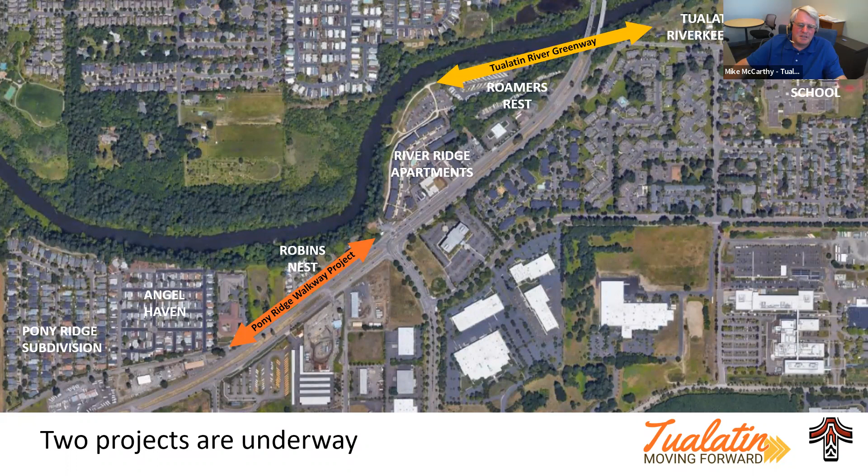The next slide shows a little more of the specifics. It'll start from right about where the bus stop is at the eastern end of Pacific Drive, where it meets Pacific Highway 99W, and run along that northwestern side in front of the Robin's Nest neighborhood and along some of those properties, up until it meets the existing sidewalk at the bus stop just west of 124th Avenue. So it shows about the general location.

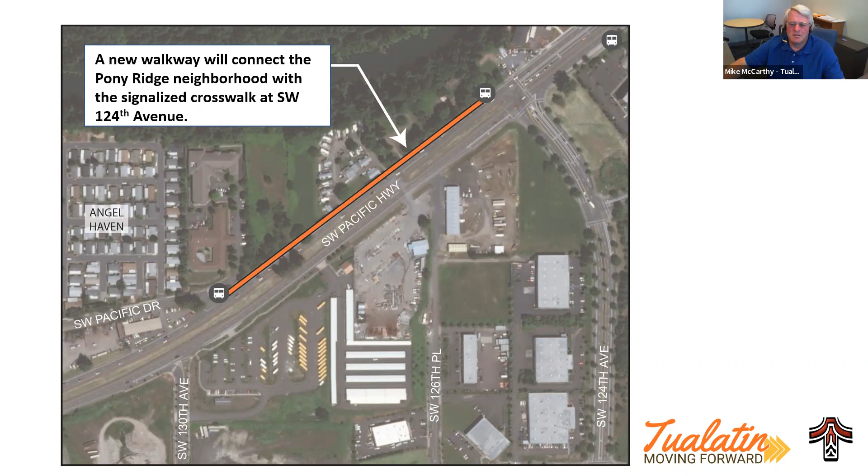Our plan is really just to build a basic walkway and keep disturbance as small as we can, and not make too many changes to the properties and anything else in the area. I think our next slide has a little more specifics about the project.

This kind of turns, so north is diagonally up and to the right on this aerial. It shows a few more of the specifics of where it would be. We're planning to build it within the existing highway right-of-way, but recognizing that it's a better walking experience the farther away we can get from Highway 99. The plan is to build the walkway along the far edge of the right-of-way away from the road, connecting again from Pacific Drive up to 124th Avenue.

You can see from the picture on the top left there, we'll have to work around some existing slopes, and we'll tend to be on the far side of the ditch. But between the back of the ditch and the fence is typically where it would end up being, where there are fences.

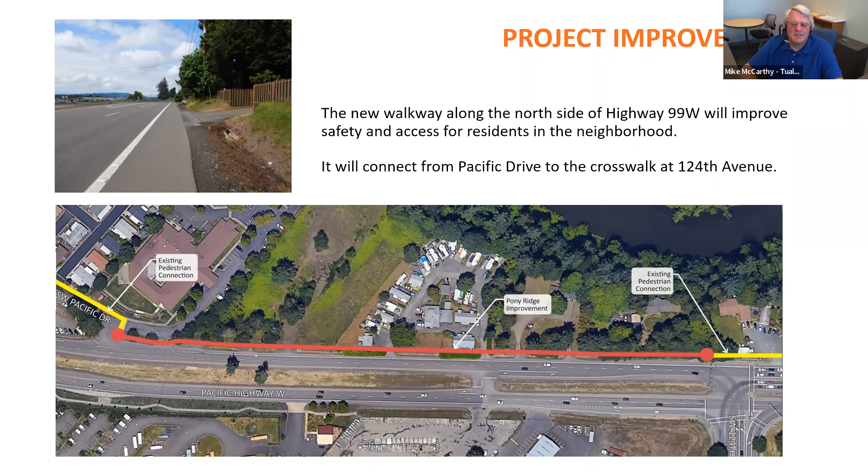And then the next slide starts showing some more of the specifics. And we're still fine-tuning the design right in this area.

I think you muted yourself, Jill. I'm sorry. Did we skip ahead? No, this is zooming in now, so we're good. Okay, feel free to chime in with anything else that I forget to mention.

This shows the western end of the project, or southwestern end. From the existing bus stop, unfortunately it looks like we will have to take out a couple trees right there, just because of where the path would need to go - it's hard to keep their root structures intact. We're hoping to work our way around the Riverwood Prestige Senior Living sign. It's possible that may need to move, but we're looking at trying to go on the road side of that. And then a couple of the light poles would also be getting relocated to serve the path a little better.

And then we're working along the back side of the ditch. There will be a little bit of extension of some of the culverts in there as we move towards the northeast, I think on the next slide here.

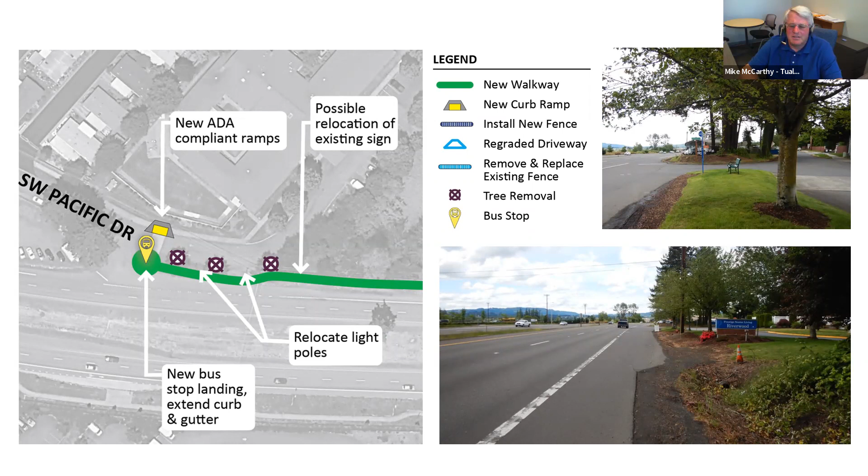Oh, and welcome, Lucy, and thank you for joining us.

This slide shows a little bit of how things would look differently after the project with the bus stop. We would be building a concrete pad there for people to wait on as they're waiting for the buses. And then the walkway would be going basically along the driveway to that Prestige Living facility up there, as it then progresses towards the northeast along Highway 99.

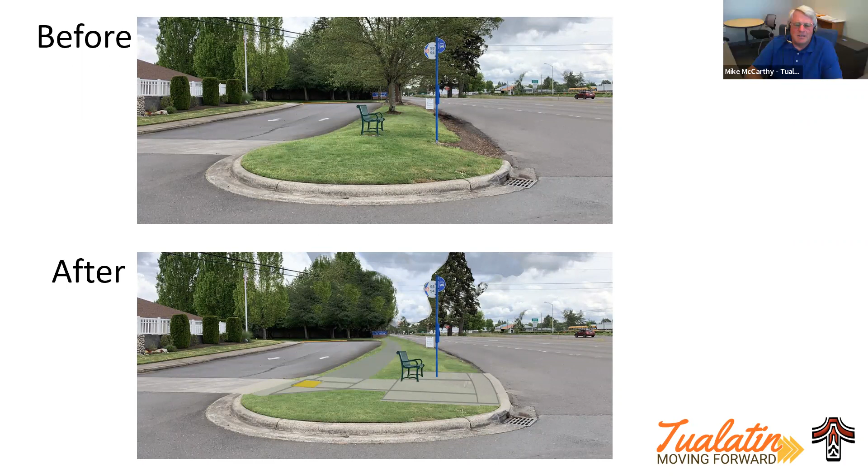And the next slide. This shows a little bit of how it would work around the Robin's Nest neighborhood. Is there anybody here from Robin's Nest? I guess it's hard to tell with people muted.

So our plan is to leave as much of the hedges in place as possible. That's a little different from what people may have seen earlier, where there was an earlier drawing shown that would take the hedges out. We heard from some folks that there's a lot of value to having that kind of screening from the highway.

So we'll basically be going between the back part of the hedge and the right-of-way line and trying to keep as much of the hedge in place as we can.

And then where it crosses the driveways, we'll have to do a little bit of regrading. There are some federal requirements for the Americans with Disabilities Act that mean we have to make the cross slope of the pathway fairly flat, which will mean a little bit of adjustment on some of the driveways.

And we are or will be in touch with some of the folks here that have the houses right next to where the path will be going, with some modifications there. We are planning to construct a new fence along the Robin's Nest property to help establish or replace some of the shielding that would have to get removed for the pathway to go through.

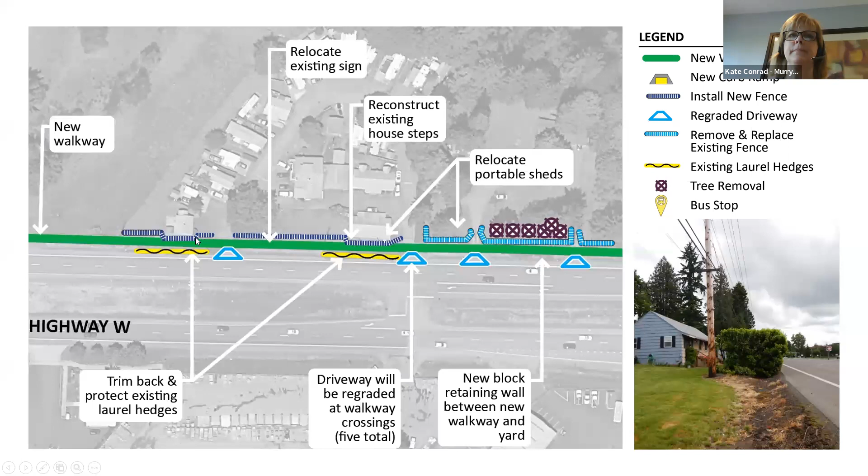And then as we get towards the east, we'll end up having to rebuild a bit of that existing fence on the property to the northeast of the Robin's Nest neighborhood. Unfortunately, there's a few trees right there that we didn't see a way we could get the pathway in while keeping in place, particularly the way some of the roots are extending out - we don't want to leave a hazard tree. So we ended up needing to remove some of those, and we'll be working with the property owner on that.

And then in some places we'll have to build a small new retaining wall, usually to cover the difference, maybe a couple feet or so of elevation between the top of the walkway and the existing yard.

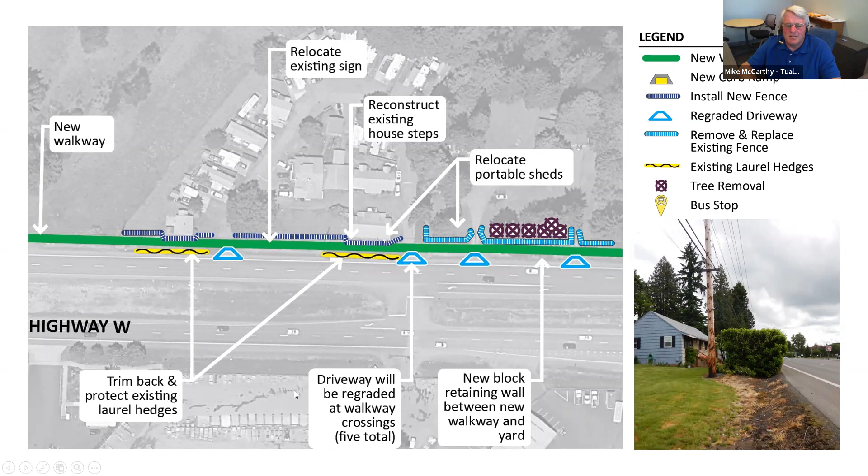And basically we'll do our best to make it a decent facility to walk on while keeping some of that same screening between the road and the neighborhood.

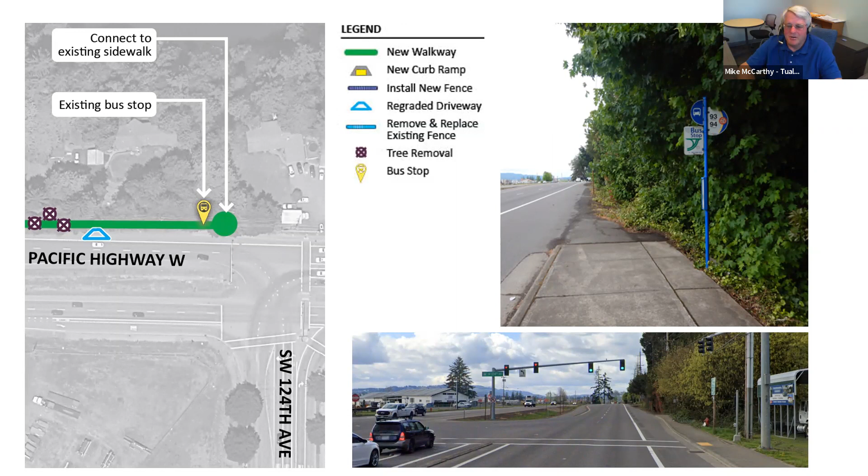Well, thank you, Doug, for joining us.

Here's another rendering showing how the pathway will look. We'll basically just have to cut back some of the vegetation, only what we really need to. Then there'll be a little bit of separation between the walkway and the roadway pavement.

We're getting towards the later stages of design, working out some of the real specifics of how it comes together. We've had to do a lot of coordination with the state to get their permission and approval to build this along Highway 99W, and there are some state requirements that have driven aspects of the design.

We're planning to build in the spring and summer of next year, so we'll be going out to bid more in the winter, then spring and summer construction.

We'll be working with the contractor, requiring them to do what they can to minimize their impact on properties and keep driveways open. I think they'll be able to keep the driveways open except when they're working in the immediate driveway area. So there may be some day-long closures of particular driveways as they're repaving parts of the pathway.

We will actually have a bid alternate for the pathway to be either asphalt or concrete, depending on what the contractor believes they can construct most efficiently, and what they believe will save the taxpayers the most dollars in getting this done. So that's the basic schedule.

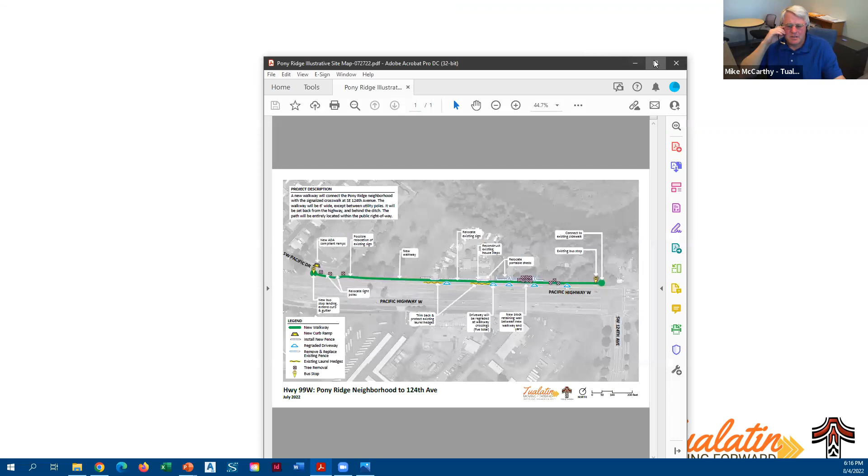I have a couple questions. How wide is the path? The path is generally 6 feet wide. There'll be some places, such as when we're going around existing utility poles, where the path will have to narrow to 5 feet for just a very short distance.

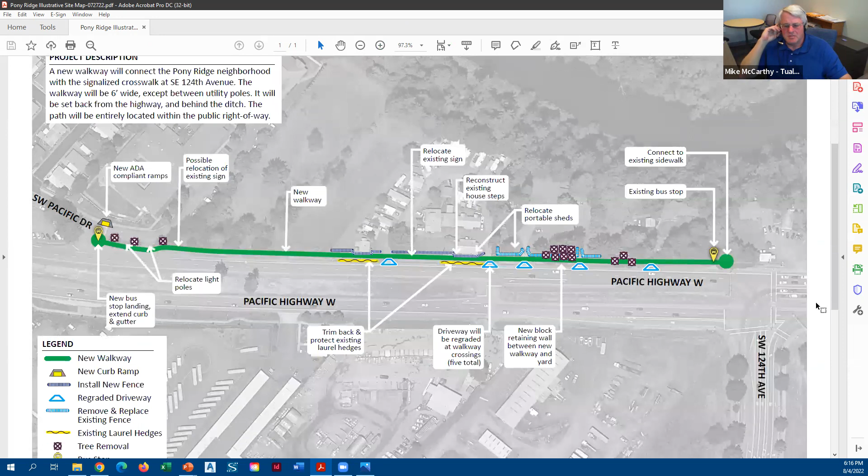The plan is to leave the existing utility poles where they are, because as you may notice, there's a lot of wires up there and some high voltage power that make it especially difficult to move.

What kind of fence are you building, and how high is it? Kate, do you have the specifics on that? I think we've discussed that the standard fence is 6 feet high and it's a wood fence. If we're replacing a fence, we want to replace it to its existing configuration. In the Robin's Nest case, we are proposing a 6 foot high wood fence.

Yeah, it is due to privacy and the close proximity between the public and private. Right.

And also, by building the path behind the hedges, you are creating a planted strip or landscaping strip for the roadway. So would it become the city's job to maintain the hedges?

No, it's actually a citywide code that anything in the right of way, like landscaping outside the road, is maintained by the abutting property owner. So it would remain Robin's Nest's responsibility to maintain the hedges.

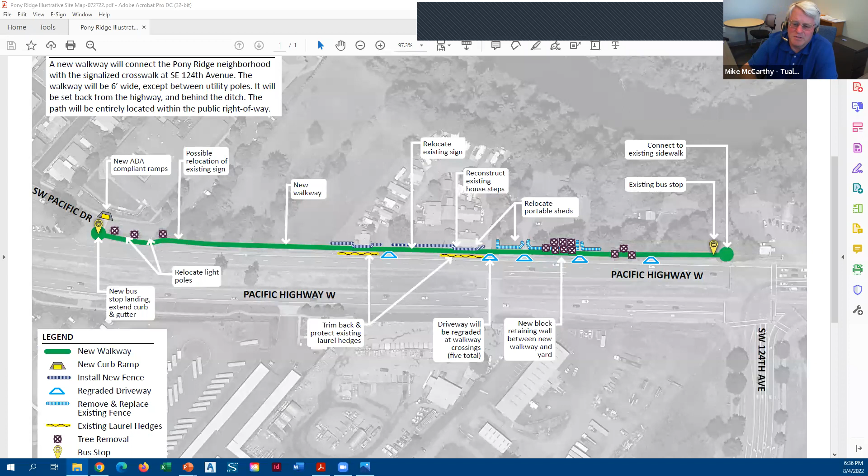Okay. We were talking about maintenance. I was in the middle of asking you about the maintenance responsibility of the work after you build this. You said that it is going to be the city to maintain it, or somebody, a government agency. How would we know as property owner that we're not going to be the person repairing damages and this and that of the walkway? It can be costly, and I don't think we can afford that.

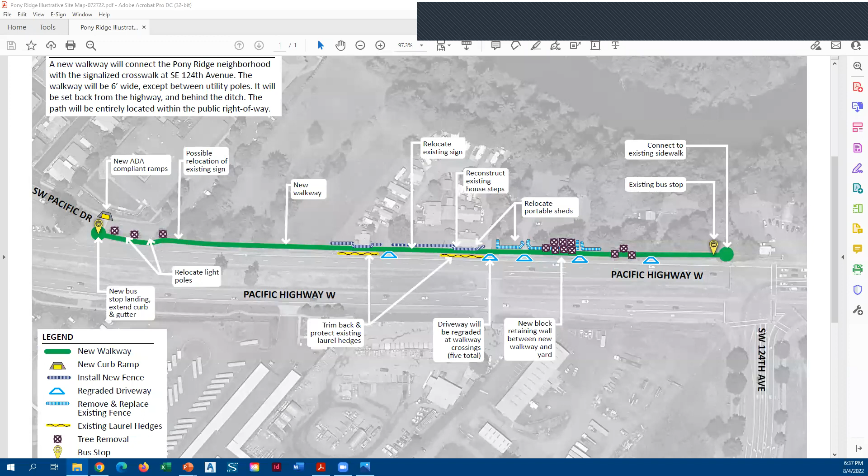So I was wondering if you can attach an ordinance to this meeting minutes saying that it is the city or the state that will maintain it, and we as owner are not going to do anything to the maintenance of the work. So the plan is to construct it in a way that it'll last for quite a while.

And with the state and the way their requirements are, the state considers this a temporary walkway that would eventually be getting replaced, like when the properties redevelop, or if the state chooses to do something to improve or change the road. So that's the context of it. And as far as sweeping the walkway or dealing with snow, that would still fall under the citywide codes, where it's actually the responsibility of the abutting property owner in terms of maintenance, and the same with the hedges and so on.

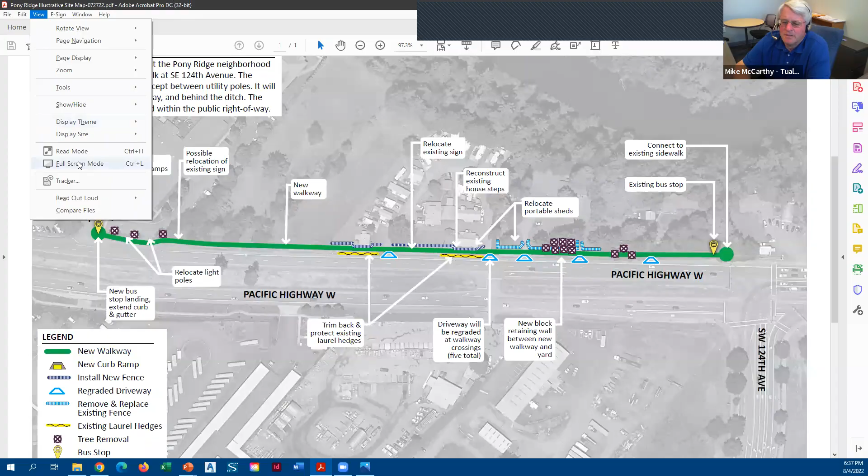So can you put that in the minutes, defining the responsibility of who's doing what, including damages made by the public, that the owner that lives along the road have to be coming out there. And you're talking about a lot of foot traffic on this, and people ride bicycles too. It would be a job to be worried about how much I'm going to repair this, do I have enough money to do this, why is it me. So I wonder if you can explain and clarify that for the owner to be free of worry, or be prepared with a budget set aside to use if we have to.

Yeah, it seems like maybe a good place for that would be in the agreement that'll go with the project, that we'll be working with through our right-of-way agents, as far as the temporary construction agreements that we'll be working out individually for each property.

Yeah, it was my question and concern, and I don't hear a clear answer from this, but I have to keep going to the next question. I heard about corner monumentation at the property corner, and I didn't see it. You said it was surveyed, maybe buried somewhere out there, but I walked along and looked at the two corners and didn't see anything. Is it possible during construction, before the walkway is built, to ask the contractor to locate the monument again with a flag or something? Because if we order a different survey for our property, it would cost a few thousand dollars. Since you already have that, we as citizens would like a copy of it. Is it possible?

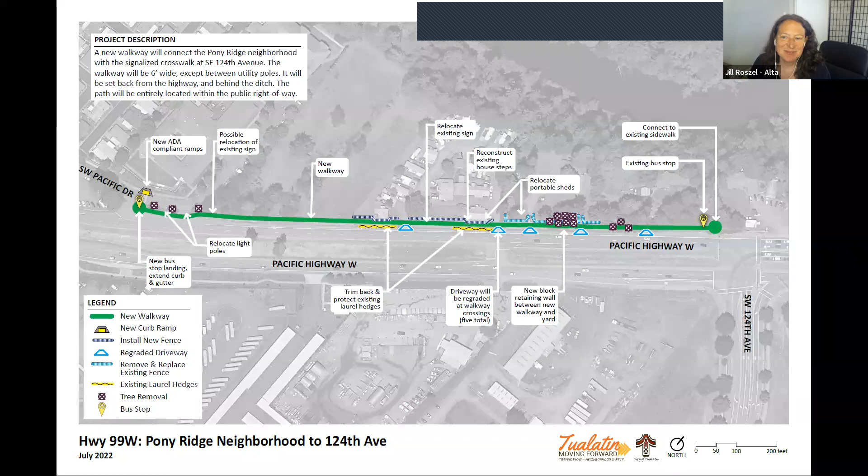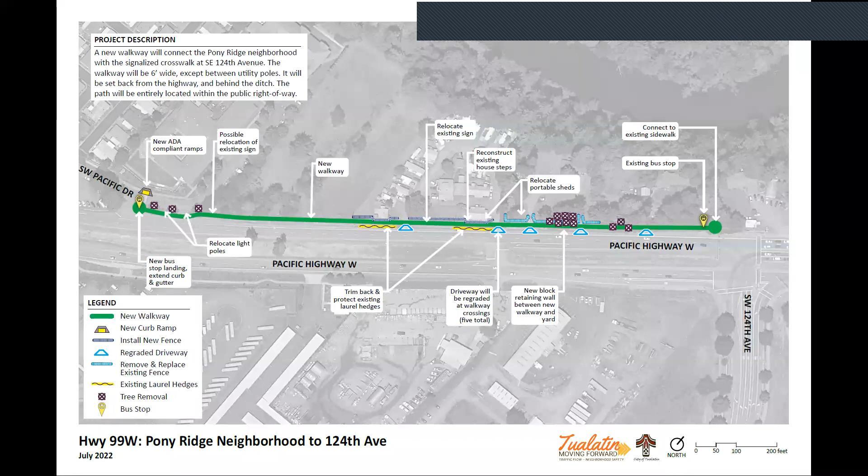Henry, Janine, John, so if we would like to meet with you individually or in person, how would we do that? I think let's make sure we have your contact information, and we'll try to arrange it fairly soon after. Within the next few weeks, we'll try to be in touch and arrange something.